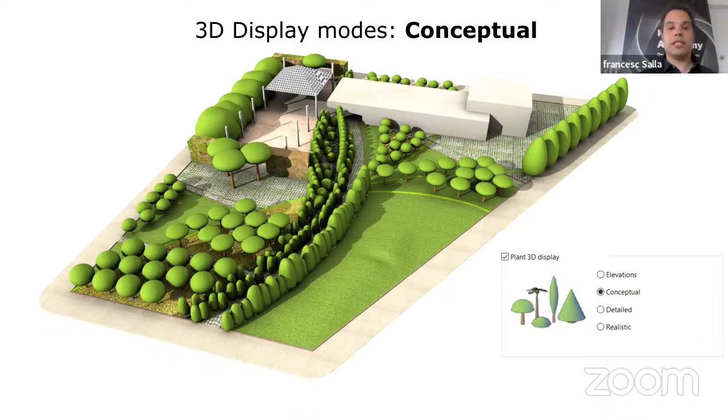All the plants have different representation modes, not only realistic but also 2D crown displays, with 2-3 different display modes in 2D. You can switch from conceptual display to a detailed or realistic mode, where the 3D geometry contains textures for leaves, trunk, and flowers. They are kind of proxies though, since when we shoot renders, even the detailed plants get replaced by more realistic plants.

They can also handle different appearances according to seasons, so we can run a kind of season simulation render with the same project in winter or summertime. Here you have a slider for selecting the season where you want to shoot a render.

There's also a 2D representation for all these elements. When we switch to 2D, all the plants are displayed with a 2D crown, all the terrains are displayed with contours, and all the urban furniture and blocks have a specific 2D representation, so you can easily work in 2D.

We are seeing that many landscape architects are more used to working in 2D, with more 2D background. So we want to make this transition to BIM easier for them, so they can still work in 2D and switch at any time to 3D representation, or work the way they want.

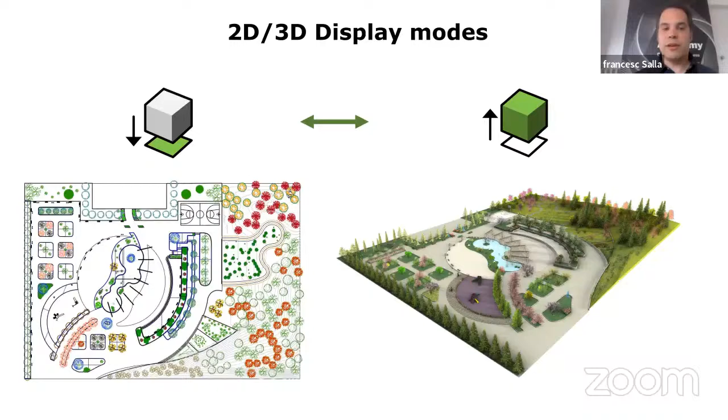Again, we can shoot renders with different representation modes according to season. All these realistic files can be generated by a plant editor built into the program, so you can add more plant species and generate these 3D plants using this plant editor.

There are more than 8,000 species, but if you're looking for a specific species not in the plant database, you can add it on your own. You can duplicate an existing file or create it from scratch, developing one of these 3D plants with this plugin and adding new species to the database.

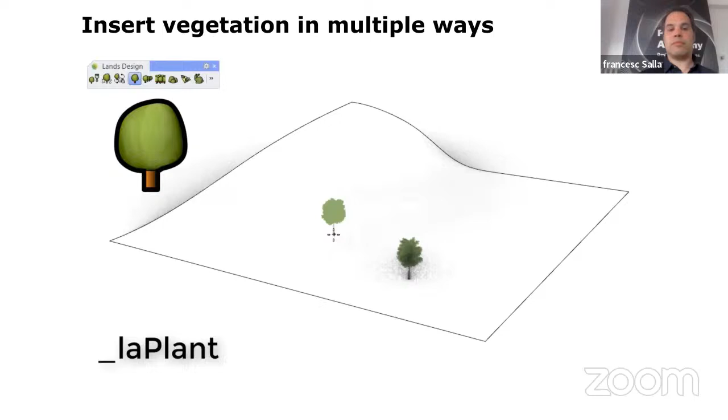All these plants can be inserted in different ways, individually of course. Notice we have a kind of surface that acts as a terrain, so the plants detect that topography and get placed on top of it.

Plants can also be inserted in a paint-like way, or by selecting points or blocks. This is a usual situation where you get a DWG file with the location of all the plants from points or blocks, and you want to replace them with real 3D plants.

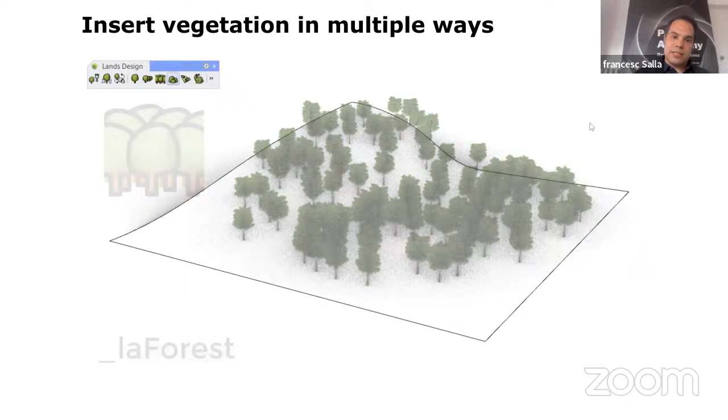We can also insert plants in rows or forests. These are parametric arrangements, so we can decide the amount of plants and the separation of these plants in these forests or rows. We always work with parametric objects with many parameters.

In this case, with ground cover, we control the density, the size of the plant, and species, and so on. There are also many powerful terrain modeling tools.

We can create terrains from points or curves. They are meshes, but they contain all the information of the operations we perform on top of them. So we can add custom fields, add paths, and change the width of the path at any time.

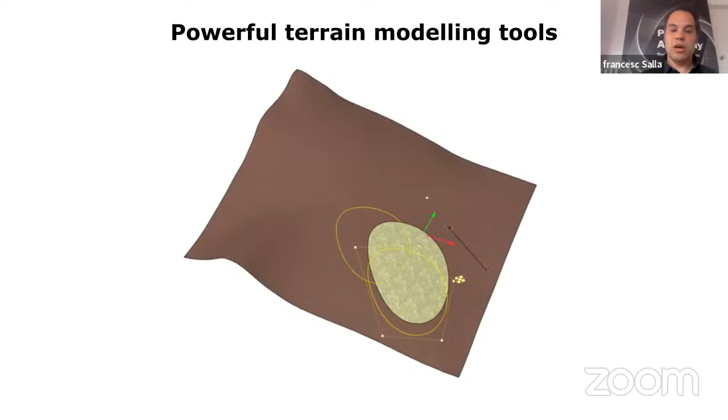Also, the volume of earth movement can be reported. According to these operations, we can generate different reports and, based on that, take some design decisions because we know the amount of volume that has been added or subtracted from adding a path.

So, well, we work with parametric objects. Also, terrains can be created from DEM files. Basically we run this command.

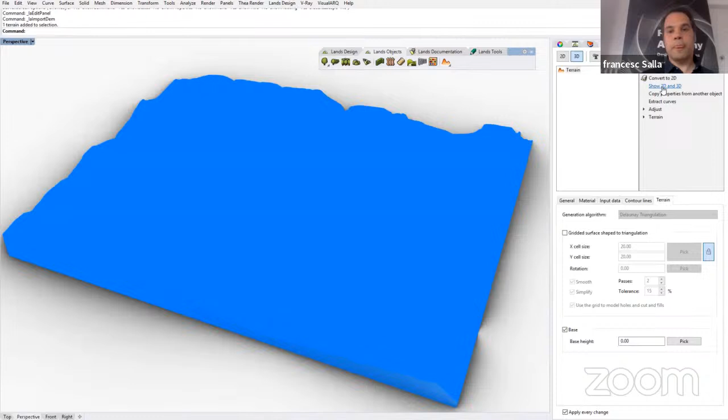We select one of these DEM files and select an area that we want to import, and we automatically generate a terrain out of it, with the option to show the contours, the 2D representation, and all of them labeled with the elevation.

And also from the Earth - this is a command where you can navigate over the world, go to a specific spot, and read public information. We have elevation data samples every 10 meters, and also the volumes.

It's information that we can import into our model. This is just a good tool for creating an environment of the project site, because if you want to work on a real place, you'd rather use a topography survey and import the points from that survey into your project. But for the environment, it's a really great tool.

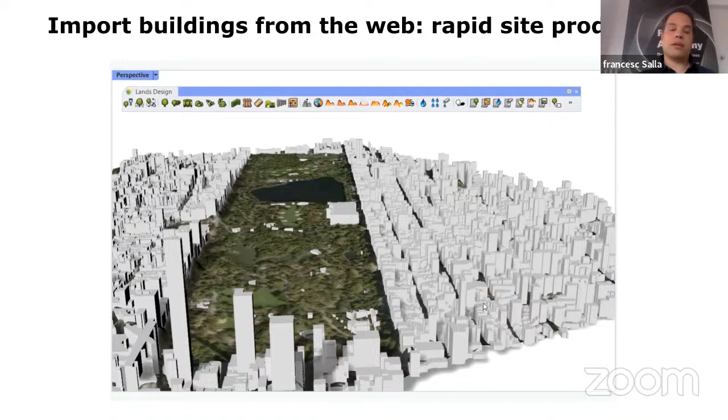And then there are parametric hardscape tools like walls, stairs, ramps. It's a new feature in this version, or fences. And also some irrigation tools for creating sprinklers, piping systems, or arrays of sprinklers.

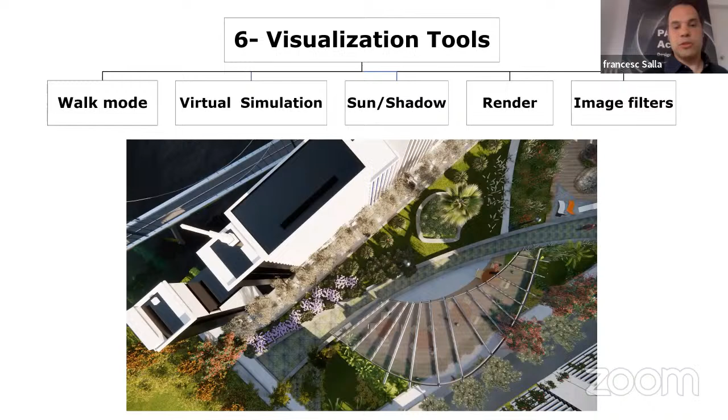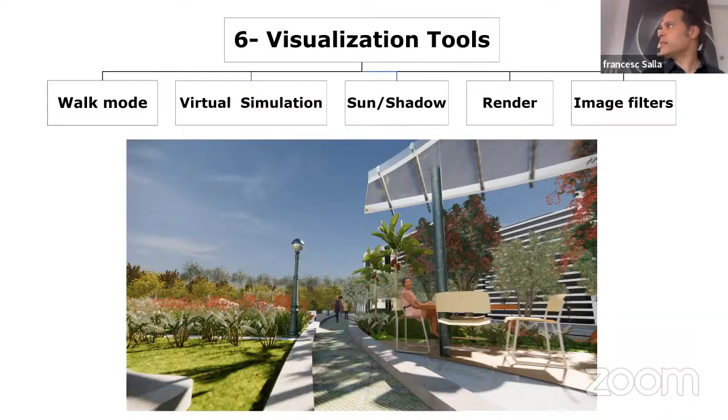For visualization, I've mentioned the option to shoot renders for season change simulation, but also, since it integrates with Rhino, we can run sun movement simulation. Or there's a walk mode to navigate through the project. But of course we can also create videos like that. This is created with Enscape, but already in Rhino there are tools to create animations.

And since it works on Rhino, it integrates with all these other amazing tools for creating virtual animations, like Enscape, Twinmotion, Lumion, or shooting nice renders as V-Ray. Also in Rhino there are great tools to produce nice renders.

And then, well, there is all this integration with Grasshopper to create parametric architecture. And we have all the Lands Design components available from Grasshopper. I don't know if you all work with Grasshopper, more or less. So that's where I don't have to explain what Grasshopper is, right?

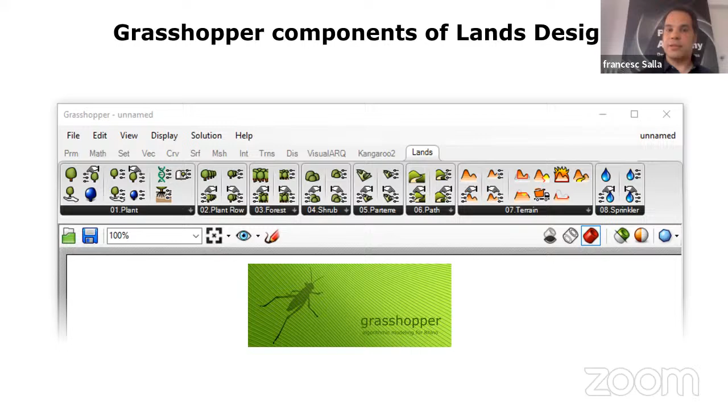That's good. But yeah, I mean, we have here the components to create plants, terrains, paths, sprinklers, and here we can see some examples.

So for example, we can reference all these plants from the model and create these pots at the bottom that are based on the size of the plants. Or we can distribute different plant species on these regions based on two lines that split these regions into different paths.

Or we can generate terrains directly from Grasshopper. We control the precision of this terrain at cuts and fills based on boundary curves, and everything is integrated here and available from Grasshopper.

Also we can use the Grasshopper components to map some environmental data with the existing 3D model. For example, we got the data from the CO2 absorption of certain plants during some years, and we were mapping this data with the existing plants in our model, and we could determine a kind of CO2 absorption analysis for a certain period of years based on that data.

So according to the amount of plants we have in the model, we could have an estimation of the CO2 absorption that is linked with our design. Based on that, we can also make some design decisions.

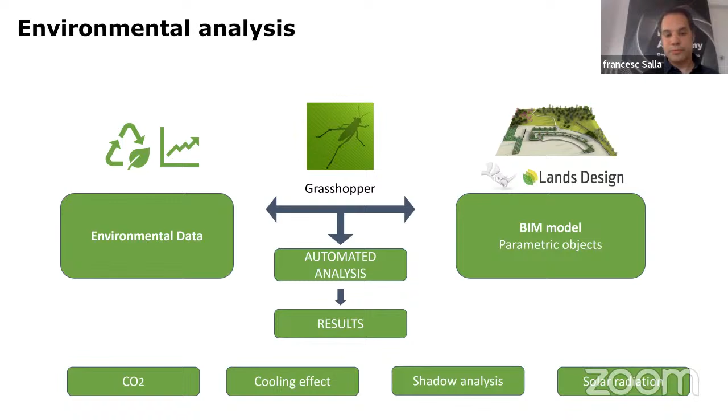And also, if we run Rhino as a plugin for Revit using Rhino.Inside, and we have Lands Design installed, we can reference this terrain in Grasshopper, deconstruct that mesh, and create a new topography element in Revit. Everything is live connected, so we can work on this terrain or plants in Lands Design running as a plugin for Revit, and everything would be transferred immediately in Revit using this connection.

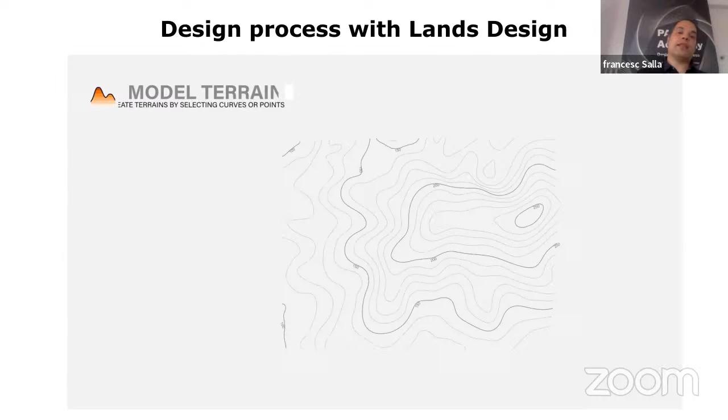And this is a video that shows some of the main features of Lands Design, showing the design process. So we may start with some 2D curves - sorry for that poppy music - but yeah, from the curves we create terrains, or we can import terrains from the web. And then once we have the terrain, we add paths, we modify the terrain according to cuts and fills.

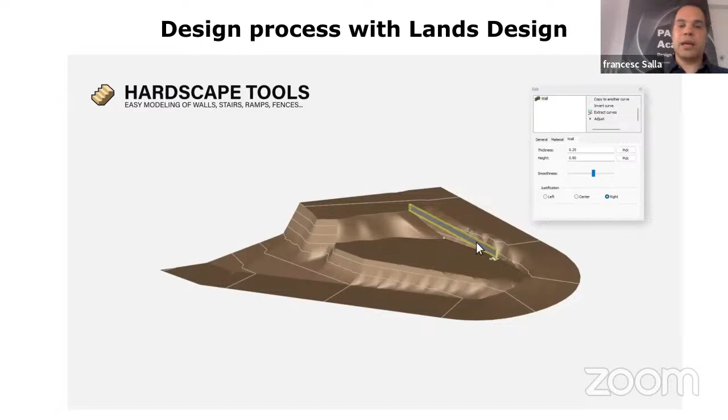From boundary curves that we select, we then add some of the hardscape parts, such as retaining walls, ramps, fences. They are all parametric objects, so we can change the distribution of the posts, the elements of the post or the walls, the thicknesses, and in the case of stairs, all the flights or dimensions of these objects. So we could do that in Rhino, but we have these parametric objects that make life easier.

Or we can insert some blocks from a library that already comes with the program. Of course, you can integrate other blocks that you have from your own library, or that you found on the web, since Rhino can open many different file formats.

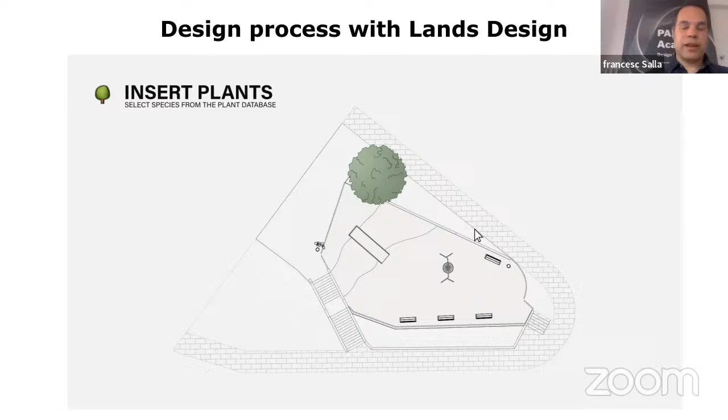And finally, there is the most exciting part when we populate the project with the plant species. We can insert plants individually, and we define here the size of the plant. We can insert them through different arrangement options, like in a row or in a forest. And finally, we just document the project.

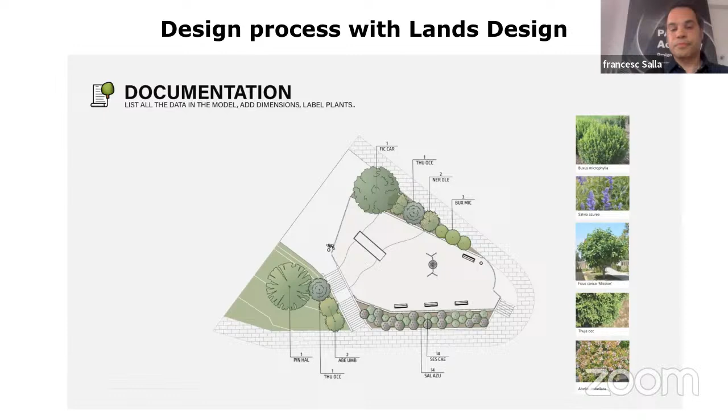Okay, so we have tools for adding labels to the plants, or for zoning the project, adding pictures for the plant species, and a beautiful layout showing the plant species report. And of course all the visualization part to show renders, record nice videos according to different seasons, and have a beautiful video at the end of the day from your project.

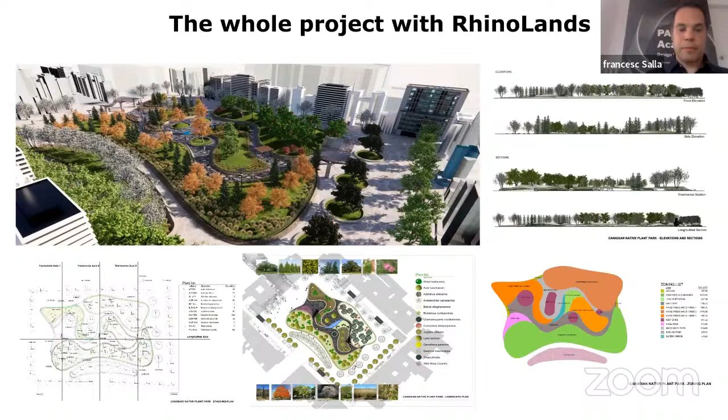So this is a kind of summary of the design process of what Rhino Lands offers. This could be a final layout with not only 3D views, but also 2D plans, zoning diagrams, reports of the plant species, pictures, everything. And that's it about Rhino Lands.

We developed the program based on users' feedback, so they will be very welcome. Rhino Lands is released on Thursday, but you can already enter into the website. It's public, you can already check it out, and actually even download the program. So on Thursday will be the official communication, but it's already there.

And that's it about Lands Design and Rhino Lands. So I don't know, do you have any comments or questions? Or we just talk about VisualARQ.

Yeah, maybe one question. The rendering, does it also work with... what do you use? That's not game software. Unreal, yeah. It should, it should.

All these plants are nothing but meshes with textures. They are embedded into kind of smart blocks, that's why we can change the features of these objects. But at the end of the day, they are just meshes with textures. If Rhino can export meshes with textures, plants should be transferred as well.

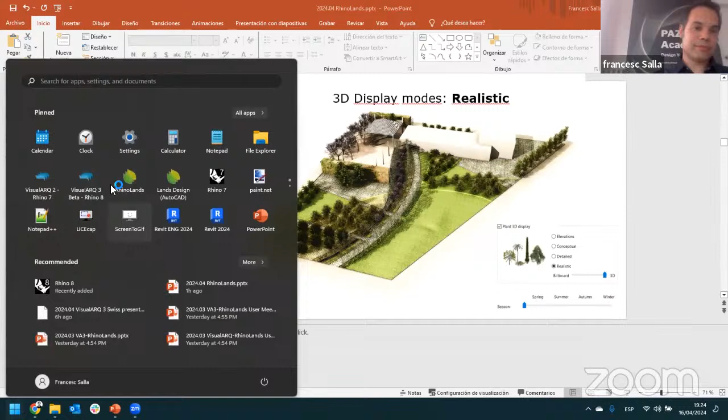Yeah, maybe I can launch the program here, so you have an overview of how it is. And we know that, okay, we had...

A selection of all the commands that we considered important in Rhino, but we are aware that we'll get many requests of tools that we missed. And of course, everyone uses Rhino in a different way and uses commands that maybe others don't even know exist. So we are preparing ourselves to receive many requests of commands from people already used to work with Rhino, and that they will miss them in there.

But again, Rhino Lands is actually aimed at people who have never used Rhino. So probably your Rhino users will use the other version, the other skin.

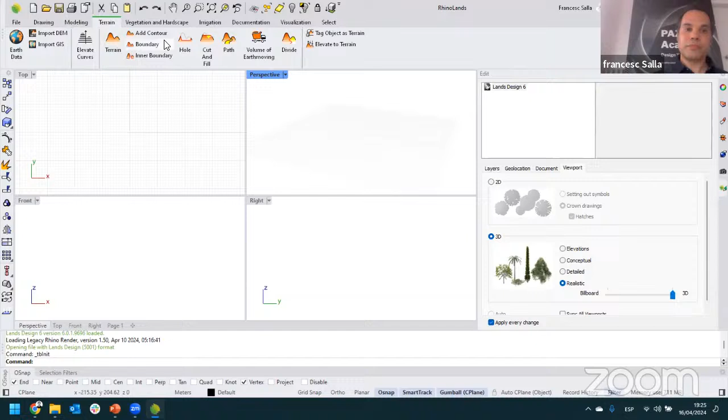Okay, and here we have distributed the commands from 2D tools to 3D. So it's a kind of timeline order, where you start with 2D, then go to 3D, then to terrain tools, and then you populate everything with hardscape tools and vegetation tools. Finally, you document the project from irrigation tools to all the documentation for listing plants, urban furniture, zones, and so on. Here we have included the Rhino drafting tools. And finally, all the visualization commands to shoot renders, also change the viewport distribution.

Okay, and here's some select commands. And basically here with the panels, we have a selection of the panels that we consider the most important for a new user, like the layers, materials, sun, rendering, and also the Lands Design, where you edit everything that you select in the model, okay?

And here the sidebar is just the transform commands, the everyday commands that you constantly work with. And of course, the command line, the status bar with the OSNAP.

This is something that needs to be... well, sometimes it's closed, so you can open it. I don't know, what's your feeling about this...

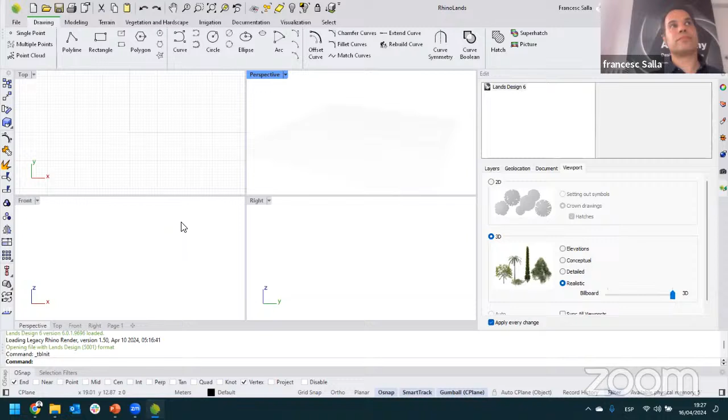Skin, new interface. Can you drag and drop the toolbars? Yeah, that's the same thing. So we can take the command line and put it in another position, that works in the same way. It's nice to have that simplified version.

So we'll insert a plant, at least to show you the feeling of inserting a new species. Okay, and now like this one.

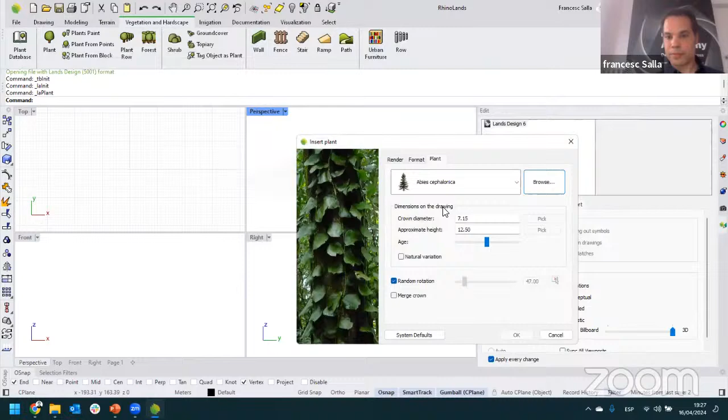Also, there is a new feature we have added, so you can now control the representation mode by viewport.

Okay, also we have here some basic zoom options. But now, in Lands Design 5, the former version, when you switched to conceptual, it was changing in all the viewports. And when you were switching to 2D, it was switching also in all viewports. So it didn't make sense to show you the plan in 2D because you could see just a line and elevation.

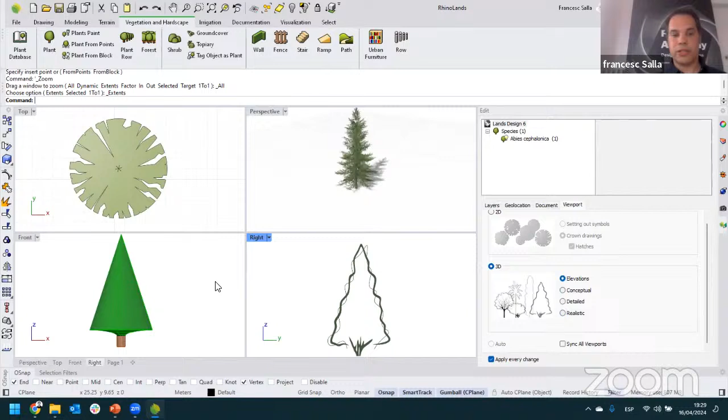Now, okay, you still have the option to synchronize all viewports. That's how it worked in Lands Design 5. But now you can say, okay, I want the 3D, I'm gonna synchronize it to have it the same in all the viewports. But I can also say, I want to show the 2D crown here, the realistic representation of 3D here, and the elevations representation here. So that's pretty nice.

Also, we have some features to join the 2D crown. Here we can select these plants and merge the crown, so we have like a contour line for all these plants.

Also, hatches is something optional, so you can customize more tools to customize the appearance of the 2D plants.

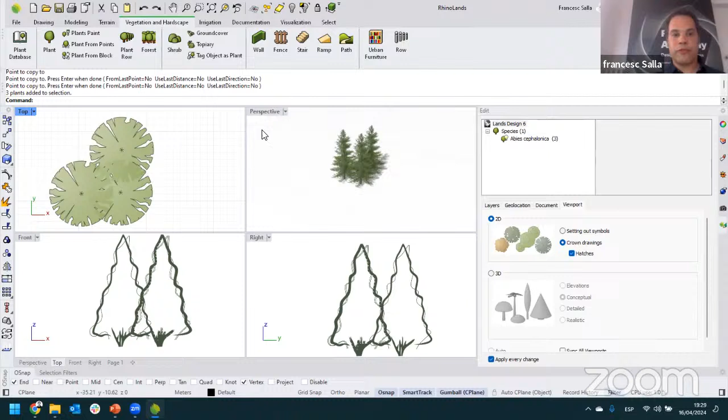And also as a new great feature, the ramp object. And that's something that is missing in VisualARQ, so I feel a little bit envious. I wish to have this tool also in VisualARQ. And it sounds stupid that, okay, we're the same company, we don't put the same thing in both programs, right? But well, yeah, things are this way.

So we can, for example, also have a curved ramp. We can have a path curve like this, and then run the ramp command. Here there are all the parameters. We can also have variable widths. And I'm just going to choose the default options.

So the height will be... no, you define the height in different ways, either as a constant slope, as the ending height, or as a rise-run proportion.

So if we create a ramp of 2 meters, and then I select this curve.

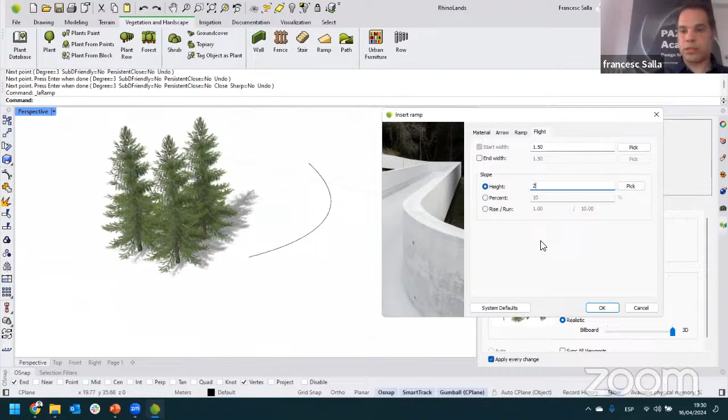Okay, so that's going to be the ramp. Even though we define this ramp with a total height, we still have the information of the slope percentage here. Or we can make a constant ramp with the slope. And of course, this ramp is based on that path curve, so we can change that with the control points.

This is one of the new features in Lands Design, which is really nice. Also, this can be floating, so you have just a slab with a specific thickness. There are many different options you can explore here.

Any more questions? You say we can now or just now? Yeah, you can. Shh, the secret.

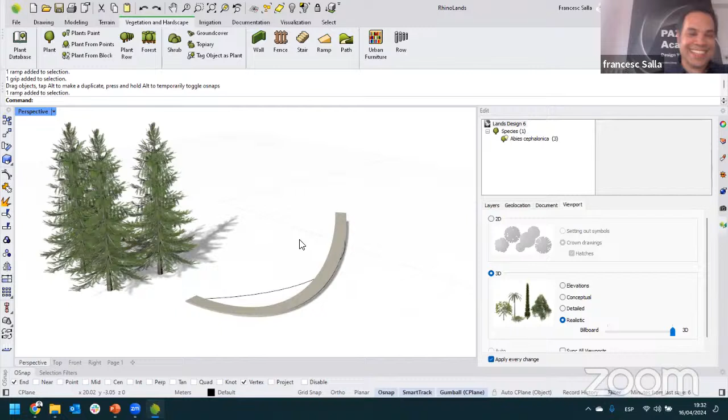Is there a trial period on the license? There is a trial period of 60 days, because also there is a new licensing method through subscription with Rhino Lands. So you have both permanent licenses, like Rhino, but also subscription-based licenses. So now you have the two options. And for that reason, we have reduced the evaluation period from 90 to 60 days. Rhino is still 90 days, but if you have Lands Design, it's less.

Two months is already a good period. Yeah, if you don't forget that you install it one day, because that's the typical situation - you install it and you forget it, and when there are just 5 days remaining, you say, okay, I have to test that. If we had a 1 year evaluation period, people would remember only in the last week that only 2 days are left.

Okay, so let's move to VisualARQ. I think I didn't open the presentation yet. It's here.

I mean, you know VisualARQ, Kevin, already. What about the rest of you? You don't know? You never worked with it? Okay, so you know it a little bit?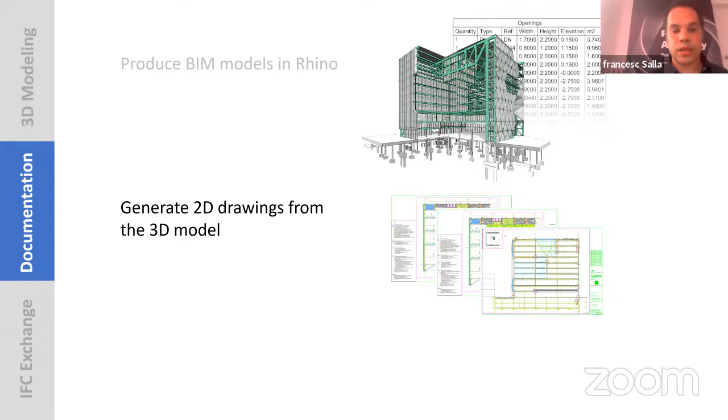So again, VisualARQ is developed according to 3 different paths. The first one is to help producing BIM models in Rhino. The second development line provides tools for producing 2D drawings and documentation from a model in Rhino. And finally, it also helps users exchange Rhino models with other software through IFC. We have users that use VisualARQ in totally different ways, even though all these paths are connected - some use it for all 3 reasons. But according to each development part, there are some features that can be interesting for different people.

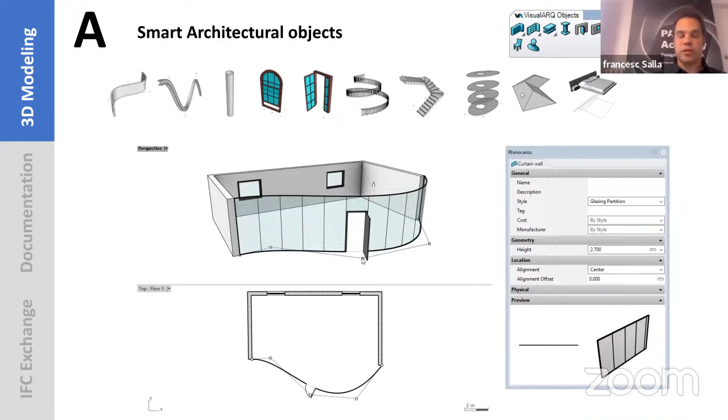Starting with 3D modeling tools, we can find this library of architectural objects. They are parametric, and they have different representations in 3D than in 2D. They have some intersections - walls intersect each other, so they clean their intersection. Doors and windows generate the opening automatically in walls or curtain walls. So there are these associations that make these objects more convenient for quickly modeling a project, but also for producing the 2D drawing because they already have a 2D representation.

Also, there is a level manager, and I will show later some improvements in this panel. This helps you work at different elevations. Each level has a construction plane at a specific height, and just by double-clicking on one level, we can hide all the upper levels and put the construction plane on one elevation.

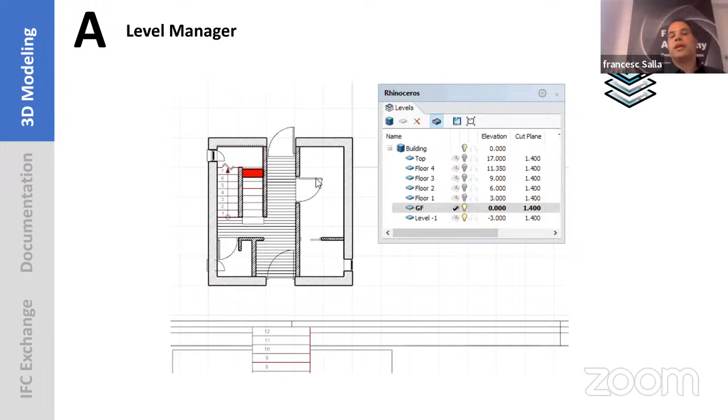That way it's very easy to work on one floor or another. Also, we can activate the cut plane from there, and when we show a model with a cut plane activated in top viewport, all the objects show their 2D graphical representation. So the doors show the 2D arc, we can see the steps, the numbers on the stair, and other features.

In a similar way, we have the section manager. We show a list of section lines that can be jogged, created from different points, unlike clipping planes. From there we activate one section or another, or we can align the project to a specific section view, so we can work directly on the sectioned model.

VisualARQ provides two different ways to produce 2D drawings. One is similar to Rhino's Make 2D tool that you may know, basically laying all the 2D drawings on the model space as 2D geometry, which is not the best BIM approach because in a large project you may have dozens of plan views and section views, and if you create a 2D drawing for all these views in model space, the file size becomes very heavy.

But still, there are some tools to produce 2D drawings that way. The other option is to basically show the real-time model displayed in section or in plan view, in a page layout, and this is possible thanks to the hidden display mode.

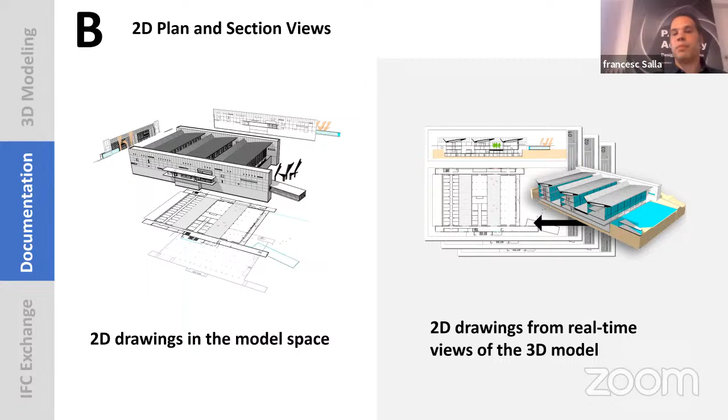So talking about the first option, there are tools to insert 2D plan views and 2D section views, and they are blocks linked with the 3D models. In Rhino 8 we can find some of these features as well, but until now you could only use VisualARQ for them. These blocks are linked with the 3D model in the sense that we make changes on the 3D model, select them, update them, and they will be recalculated with all the changes.

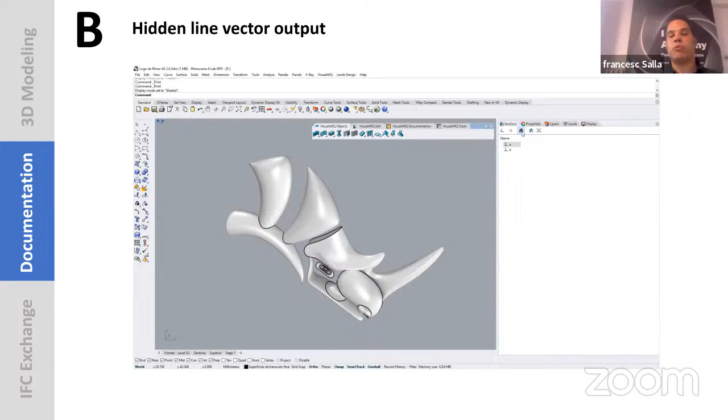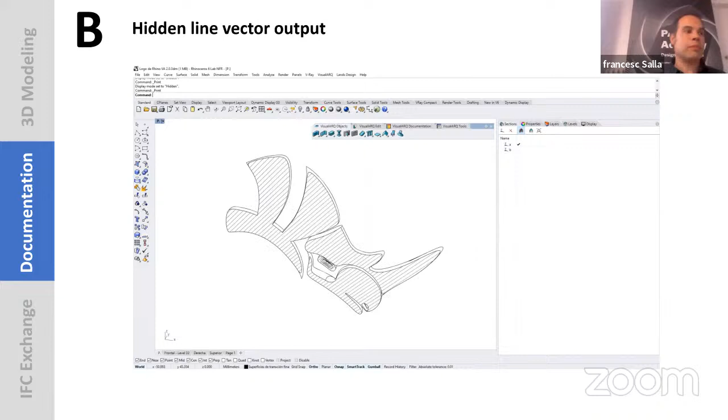But talking about this other method - this hidden display mode I was talking about lets you print what you see directly to vector output. You know that when we are using shaded mode or rendered mode, we can only print that as a raster image, otherwise we see all the edges and wires of the geometry. So if we want to print that model or any geometry as vector output, we can only do it using the hidden display mode, which is provided by VisualARQ.

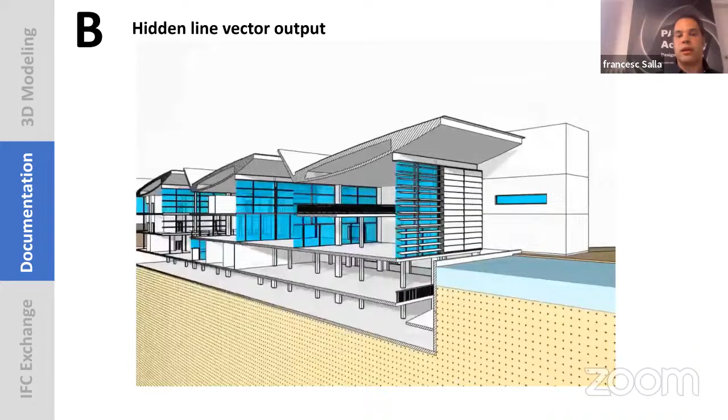So in an architectural project, it's just a matter of having a model in plan view or section view, and as soon as we use this hidden display mode, the project is ready to be printed to PDF or to a plot, whatever.

And on top of it, we'll draw all the dimensions and so on. Talking about IFC, all the VisualARQ objects are transferred to IFC with the object type they are. So we open that model in Solibri, Revit, ArchiCAD, and we identify the objects as beams, walls, windows, and so on. In most cases, or maybe a few cases, all the parametric features will be preserved - a wall in VisualARQ will become a true wall in Revit or ArchiCAD.

But the reality is different, because depending on how you have created this wall, the other software may not recognize these objects as a true wall, but as geometry tagged as a wall. Or for certain object types like stairs, railings, or curtain walls, we will only be able to transfer geometry with a specific type as static data design.

But for Rhino geometry, we can use these features to tag, for example, a polysurface as a slab. We can tell any piece of geometry to be exported as a slab, as a beam, as a roof, and the other software will identify that as a slab or floor - not as a native one, because the original geometry could be anything, but at least as something you can document and find in the other software.

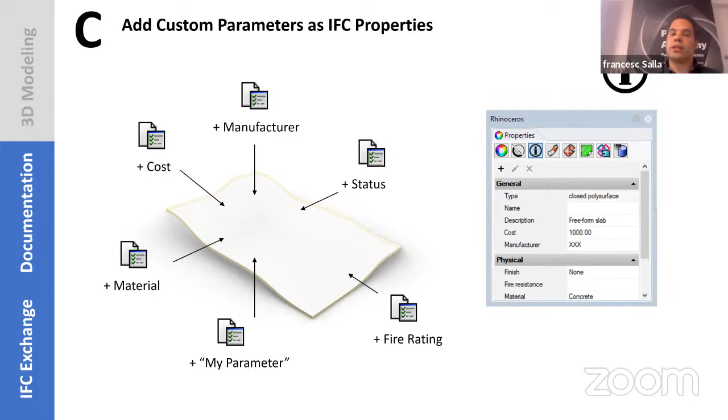Not only the IFC type, but also custom parameters can be added to geometry, and they will be exported as IFC properties, stored as other parameters. All this data can be displayed in tables, and there is a new feature in VisualARQ 3 I'm going to show you related to that - a new way of producing quantity takeoffs, because right now you produce them as 2D tables in the model space.

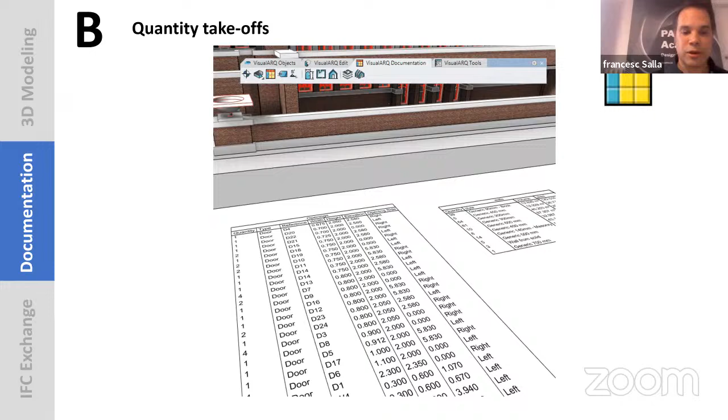In a second, you will see how this works in the new version. This concept of flexible BIM basically comes from two different reasons.

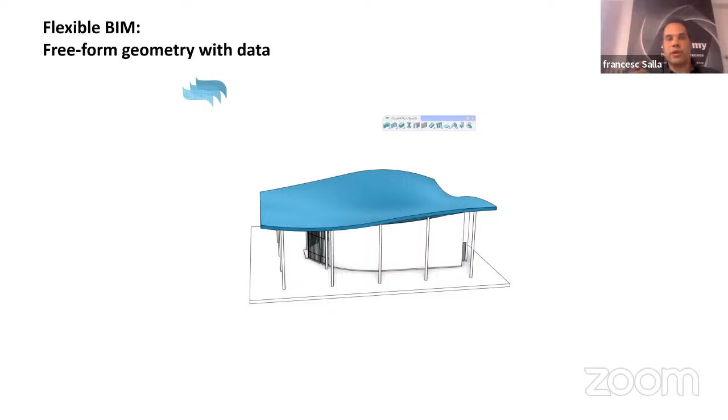One is that VisualARQ lives in the Rhino environment where we can create any kind of freeform shape. And with VisualARQ, we can turn these freeform shapes into informed objects, so we can work with complex geometry in a BIM environment.

But the second reason is because of the way it integrates with Grasshopper. VisualARQ does it in two different ways. On one hand, all these architectural objects can be created from Grasshopper definitions, so we call them the Grasshopper styles. On the other hand, we have all the components available in the Grasshopper interface.

Talking about the first case, this is like a regular Grasshopper definition that generates this sliding door. This is a kind of door that is not possible to achieve with system doors in VisualARQ. So we have sliding doors, but you cannot control the position of the leaves and other details.

So this is a Grasshopper definition that generates this door, and we can use it to produce a new door style. All the input parameters that we have in the Grasshopper definition become parameters in the properties dialog. So we can change the dimension of this door directly from the properties panel, but we're basically editing using the Grasshopper parameters that are running in the background.

And Grasshopper is hidden now at this point, so people who don't know Grasshopper can take advantage of these objects that are generated by a Grasshopper definition.

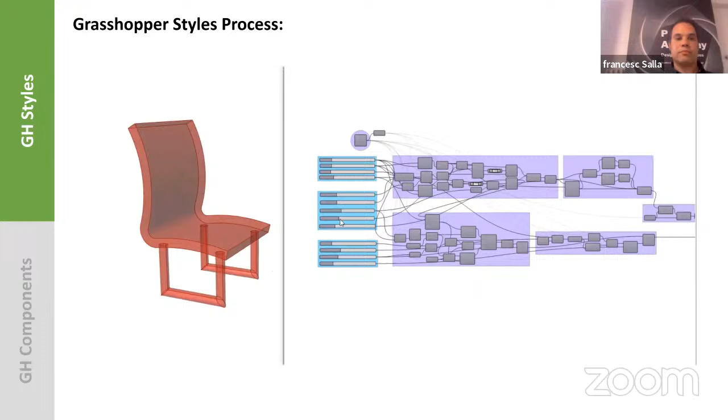This is a short video of the Grasshopper style process. We have a Grasshopper definition that generates this parametric chair, and we create a new furniture style using that Grasshopper file. Once the new style is created, we define the default parameters, default dimensions, but also we can assign materials to different parts of it.

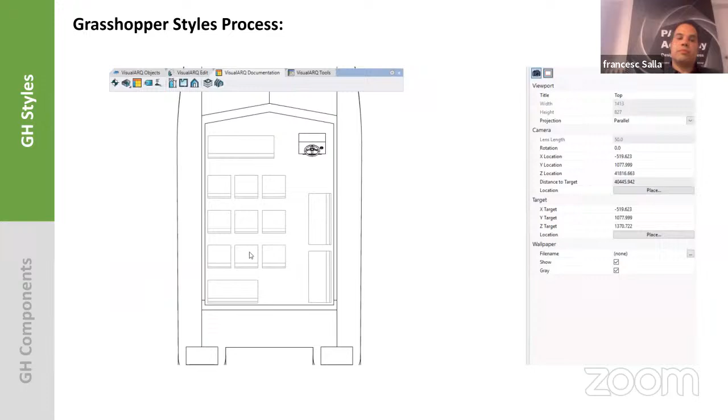But at this point, we can just insert this object in our model. We change their parameters from the properties dialog, and all these objects that we have can be listed afterwards in tables. So yeah, we have custom dynamic blocks in our model driven by Grasshopper definitions. That's the idea.

Any questions about that? Do the custom objects also have a different 2D representation? Can you also set that?

Yeah, you can have in your Grasshopper definition some output components that are assigned later on to the 2D representation of the Grasshopper file, of the new style. So you control which geometry goes to the 3D representation and which other goes to the plan representation.

Am I correct that you have like a base chair, for example, and then you can modify that chair, changing the layer, changing the number of legs, and then import that modified one into Grasshopper? Yeah, you can reference that chair, the adapted one, and then modify it further and do all kinds of stuff. Yeah, you can reference styles, objects, and the styles, and you can read the parameters that this object has, even if it's driven by a Grasshopper definition, and do modifications based on these parameters.

So yeah, also the goal is that in Grasshopper you generate something, you bake it, and this becomes like a dead geometry in Rhino, it's not parametric anymore. But with this integration, you have one object that is using, I mean, you have hundreds of objects using one style, using one Grasshopper definition, and all of them can be changed parametrically in Rhino. And you have like a parametric object.

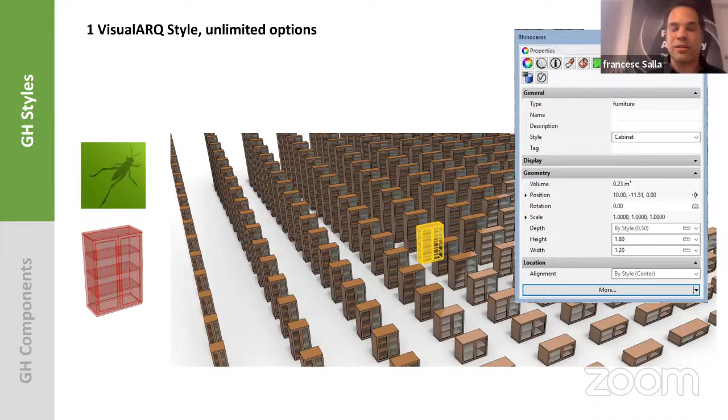On Food4Rhino, you can find some of these objects that people share.

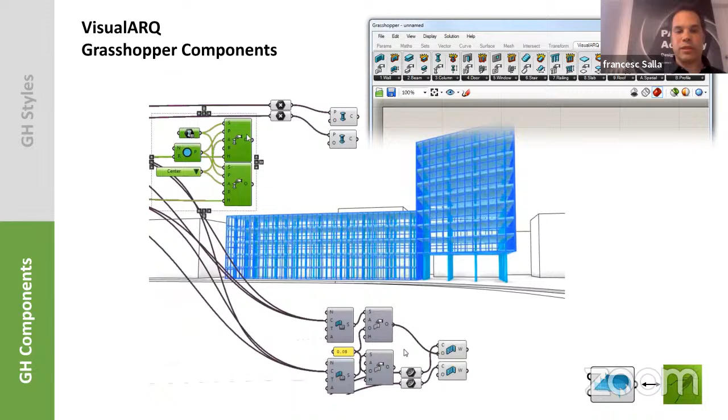And well, this is like the other way VisualARQ integrates with Grasshopper, similar to Lands Design. So we have all the components to create walls, curtain walls, columns, and so on available here. We can create parametric designs with these objects, and once we bake them, they become VisualARQ objects in Rhino.

So basically, there are components to create new objects. Like in this case, we have a wall that requires a path curve, and then we have some other options to change the height, to change the alignment, to assign some style. So we have also components to create new styles. Styles are what determine the features of objects, like in the case of walls, the number of layers and the thickness of the wall layers.

And then we have the opposite commands, to deconstruct objects and obtain their path curve, their height, and also the information of the styles, so number of components, the layers, the thicknesses. So all these are available there to do anything you want.

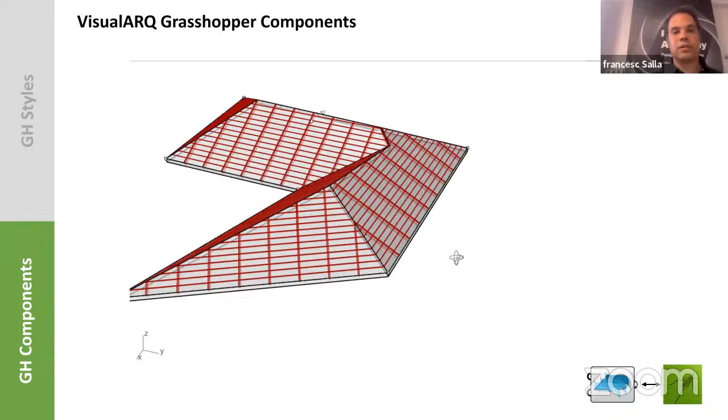Yeah, like parametric towers done with slabs and columns to generate the structure of a roof automatically, just referencing a roof and obtaining all the top surfaces and generating all the structure with beams. Also to manage data on geometry.

For example, in this case, all these columns are referenced using this component, and we can bake a list of names to that geometry with this component. It's an update property, so with a push of a button, we bake the list of names to those columns. So we can assign data to geometry very quickly, just with a few components. And later on, we can use that data to create reports, to export that information to IFC files and so on.

Or if we run Grasshopper files with a Grasshopper Player, we can also generate VisualARQ objects at the end. So, do you know if you're using the Grasshopper Player? No? Do you know what it is? Because, I don't know why, but many people don't know about it, even people that use Grasshopper.

So the Grasshopper Player is basically a tool in Rhino where you select the Grasshopper file and it lets you run a command like any other tool. In the Grasshopper definition, you define the steps to follow the command line, and the geometry that you make after the command ends.

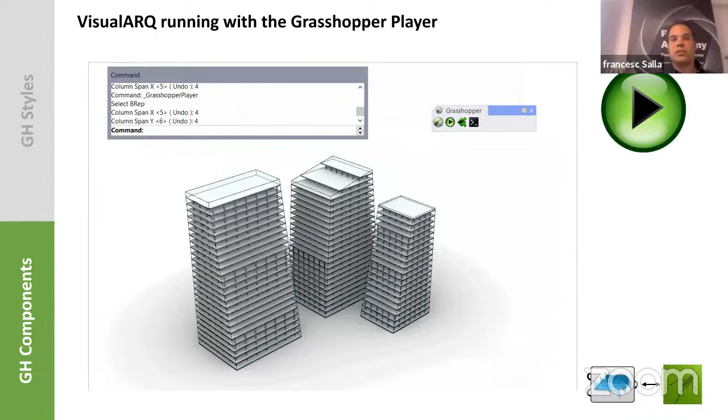So in this case, we are creating some structure by picking a volume and then defining the column span in X and Y direction. But actually, everything is controlled in the Grasshopper definition. Once this is done, we can share the definition with somebody who doesn't know Grasshopper, and they can just run it as a new tool or a new command.

And using this technology, we are able to generate more commands for VisualARQ. This is the VisualARQ Labs plugin, also available on Food4Rhino. It basically expands the VisualARQ features with commands run through the Grasshopper Player. We put them into a toolbar, and the user just needs to install that plugin to get more commands for VisualARQ that don't exist in VisualARQ itself.

In this example, there's a command for creating slabs by selecting walls. There's a Grasshopper script in the background that takes all the boundary curves of the walls, all the path curves of the walls, generates like a single boundary or two boundaries, and generates a slab using these boundaries. Actually, this is a command that I developed myself, and I'm not a programmer.

I just know some Grasshopper, I have some basic Grasshopper knowledge. So I feel like I can play the role of being a programmer for one day, without having a clue of programming languages. It's great that these tools are there, so you can create your own tools and share them with people that don't know Grasshopper, and automate workflows.

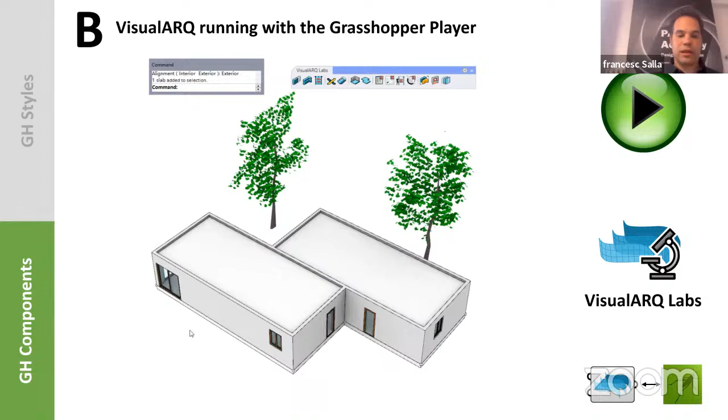And also, in this case, Revit integration. So we have Rhino.Inside, also with VisualARQ running for Revit. This is an example of how it works. With a VisualARQ pipeline, we can reference all the walls. This is actually Rhino and VisualARQ running inside Revit with the plugin.

We can deconstruct these walls to obtain the path curve, and also deconstruct the options to know the height of the walls. Since we're running Grasshopper from Revit, we have all the Revit-aware components to create walls in Revit. In this component, we need path curves, so we know this information since we got them from the deconstruct wall, and we know the height as well. So we have an immediate transfer of walls from Rhino to Revit with just a few components.

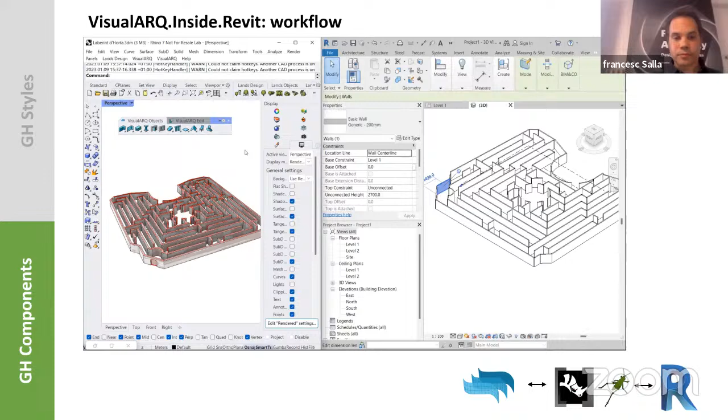So this is like the basic workflow, but we have a more advanced definition for Rhino that is hidden here.

But it not only transfers the geometry, but also the information of the styles. In case of the walls, all the layers, the thicknesses, and generates new families or new types in Revit. So you can just focus on the VisualARQ model, and all the objects will be transferred as true Revit objects. Unlike IFC, here we skip the step of having intermediate files.

Since everything happens in Grasshopper, if you are skilled in Grasshopper, you can control how the geometry and data is transferred. You have better control of the model, how it goes from Rhino to Revit, while in IFC everything is more limited.

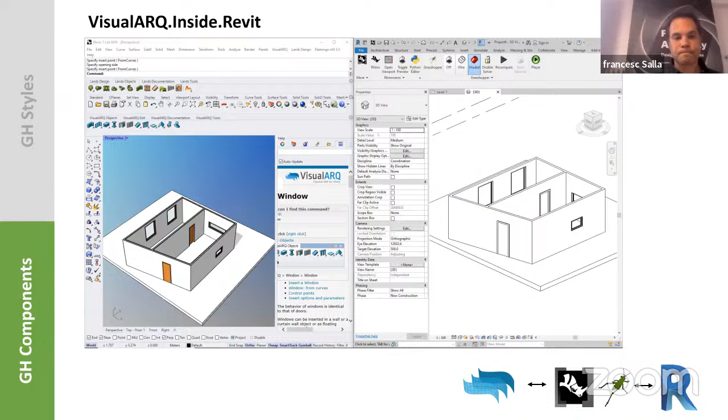This is another example of how you can put that Grasshopper file as a button in Revit. When you push it, you automatically transfer all the model from Rhino to Revit, and you can keep working on the Rhino model. When you want to see the changes on Revit, you go back and push this button again, and it calculates all the changes.

All these definitions are available on Food4Rhino, so you can play with them if you like. And now I would like to show some user projects according to these different ways people are using VisualARQ.

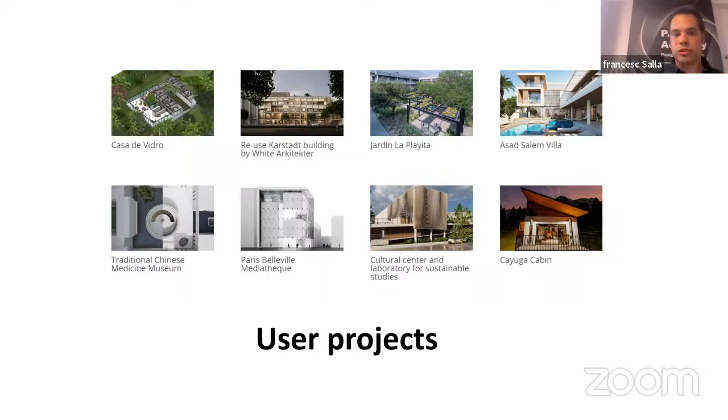Of course, we are seeing VisualARQ widely used in early stages of the design process, from academic projects to conceptual competition projects, like in this case of White Arkitekter.

Also in residential, housing, not only projects that haven't been constructed, but also real projects of different sizes where VisualARQ was used, also for reporting all the bill of materials, all the quantities of wooden frames, wooden studs in this case. So everything was reported with VisualARQ.

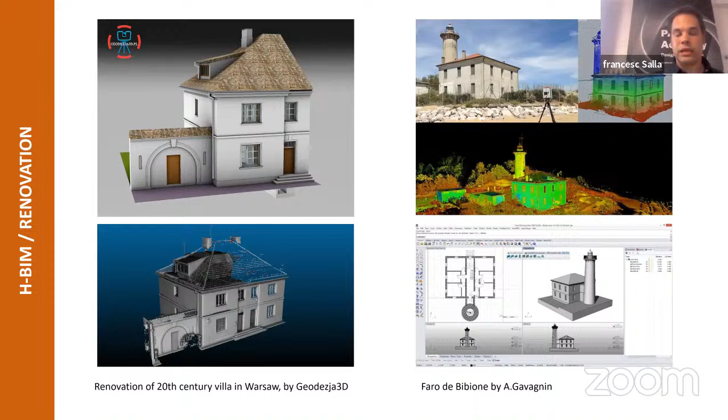Also for historical BIM projects where a point scan has been brought into Rhino and VisualARQ was used to reconstruct everything on top of it with BIM objects. Finally, people could deliver a BIM model at the end of the day, or produce the 2D drawings as a result of having all the 3D objects created with VisualARQ.

For interior design, where you need to set up the environment of the project, you work with very detailed and unique shapes, but you still need to have a wall, windows, ceiling, slabs, and also produce all the 2D views, sections and plan views.

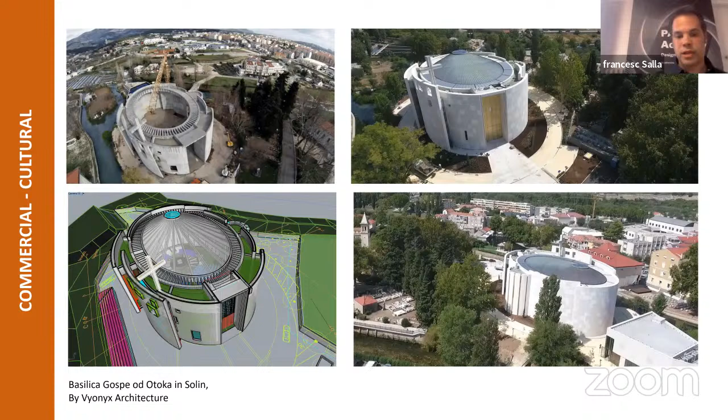So we are seeing also people in this field, or commercial and cultural projects, very unique. We're seeing VisualARQ being used a lot.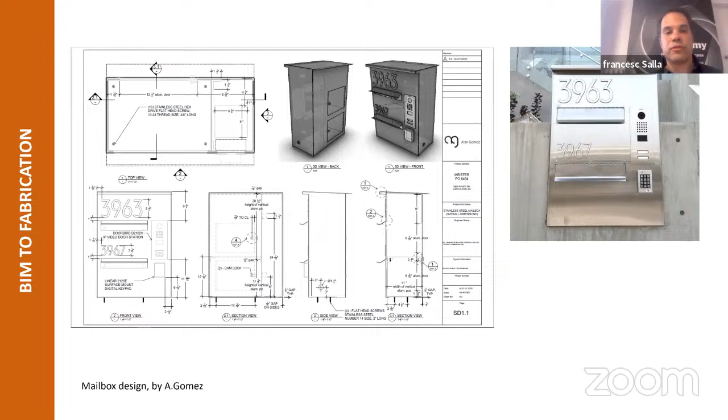And for producing 2D drawings, it doesn't matter the scale of the project. So VisualARQ tools can be used also for small projects like that.

Or in landscape design, also for creating the architecture around the project, but also for the elements in the landscape design, such as floors or beams or structure, you can use VisualARQ.

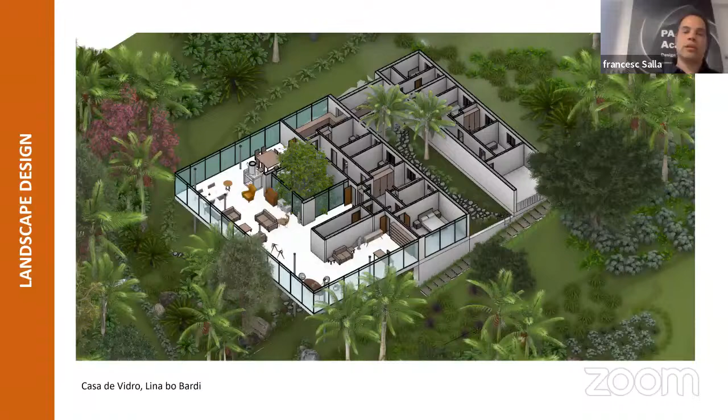Or in marine design, we're also seeing some users take advantage of the tools to produce section views, section drawings, plan drawings, or use VisualARQ objects, for example, to extend walls to a curved shape of the hull of a yacht. So also some of the architectural objects are useful in this design.

And now let's see new features in VisualARQ 3. They are not all, but the most important ones. I don't know when we will release VisualARQ 3, maybe in one or two months. So we're very close after many years of wait.

There have been many improvements in the level manager, because now we can activate this magnet icon, the constraints icon. When this is on, all the objects sitting on one level, or located within a level, move if we change the elevation of the level. The objects just update their position. If you don't want to run the risk of moving an object by mistake, don't worry, just don't activate this button and nothing is going to happen. So you have very good control of the link of objects with levels by activating this magnet icon.

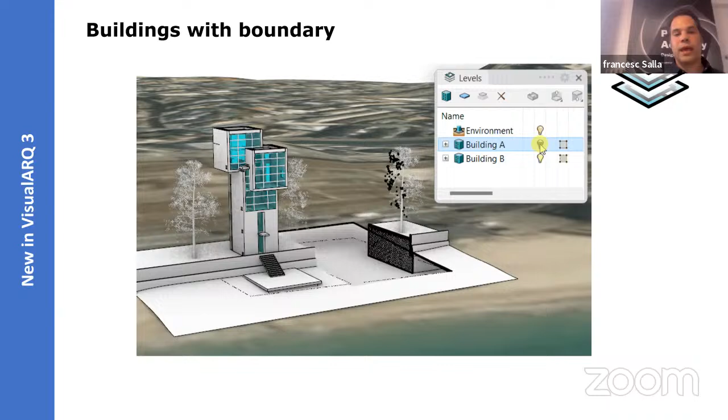This boundary also applies to levels, so that makes it easier to isolate levels if we want to work on just a specific part of the model.

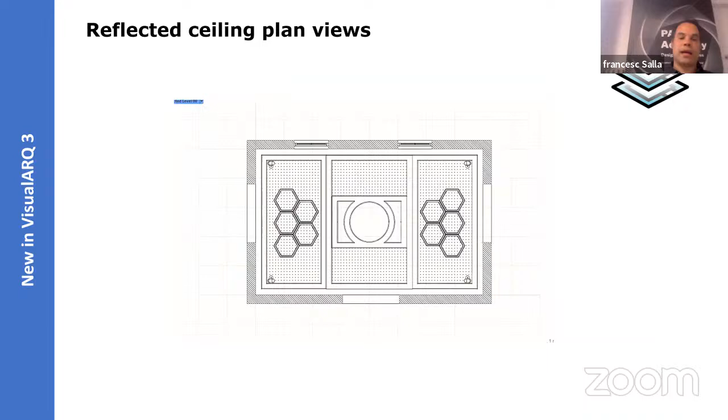Also, we have integrated new tools in VisualARQ 3 for showing reflected plans. Now you have quick access from a level manager to show the model as a reflected ceiling plan, just to show everything upside down, or from the bottom upwards basically.

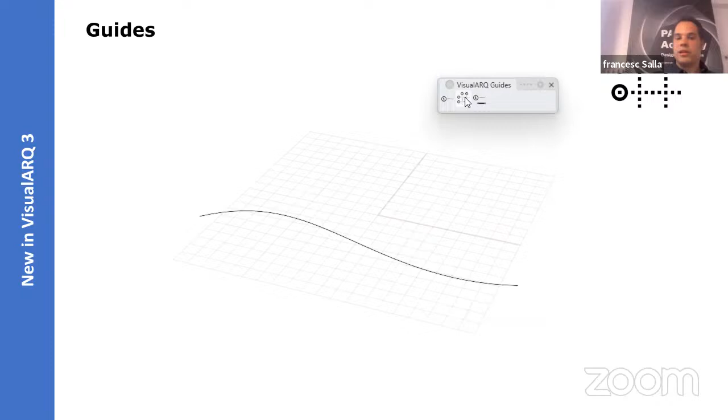There is also a new element: the guide. I introduce you to the guide object, and it's a labeled object that can be inserted as a grid or individually, and can be edited individually as well. When you create objects on top of these guides, they link to them.

Curtain walls are stretched or moved if we move these guides. You also have a big control of which object types are linked to the guides, even if they are sitting on top, if we want to move them or not. So you have very good control of this link of geometry with guides, and not only VisualARQ objects, but also any Rhino geometry, like a box or curve, is linked to these elements.

And what I was mentioning before about the new tables: now they are available from a panel, and we can show all the quantity takeoff reports, and identify the elements by selecting them from this panel.

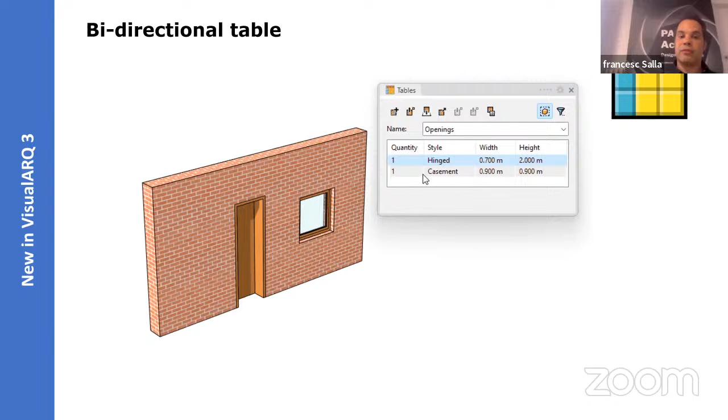This panel also allows us to edit properties of the object directly from the table. So we can change the style of an object, or add data on the object directly from those panels, so they are kind of bi-directional tables. We cannot change the area of an object, that's of course calculated information, but some properties can be editable from there.

You can also apply some filters. For example, we can filter objects by the building where they are, by level, by style, by layer, and we can also see the totals at the end of these rows. That's something that didn't exist before and was very requested by the users, but finally it's a true feature, finally came true.

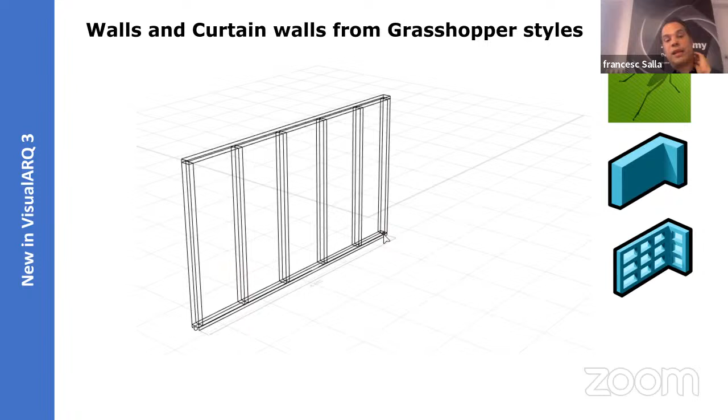Also, Grasshopper styles are now available for walls and curtain walls, which weren't available before. And in the case of walls, the joints are also calculated.

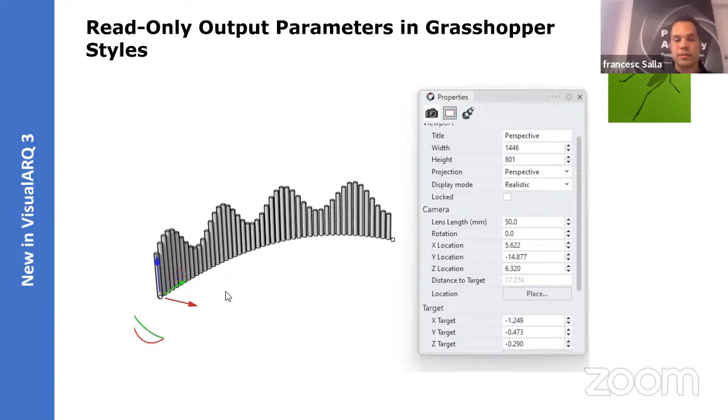Curtain walls can be created from surfaces, and that's a bit dangerous because complex surfaces take some time to recalculate, but we're improving that. It can also be a cool feature to go from conceptual design to maybe real design.

We have also improved the interconnection of VisualARQ objects. So walls, slabs, roofs, and also stairs that have the same hatch patterns as section attributes calculate their intersections and clean their intersection lines, so we have a cleaner intersection, a cleaner section view.

We have also added a layer type for slabs, so that way we can have core layers in slabs, and this will determine the priority when they intersect with walls.

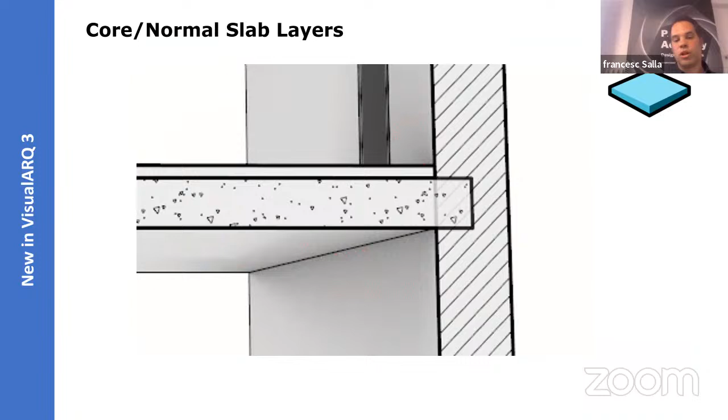Now it's also possible to insert doors and windows in roofs, which is something pretty obvious, but in VisualARQ 2 it's not possible — you need to create an opening manually and explode the window and orient it. So now you can do it very, very quickly.

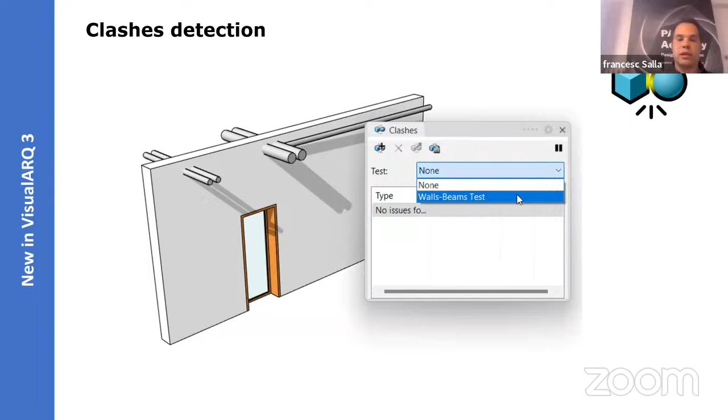We have also added a tool for detecting collisions between two different sets of objects. We can detect soft and hard clashes, basically collisions and clearances according to different criteria, and we can define different filters for each set of objects. For example, we can find collisions between walls and beams, or objects in layer A with objects in layer B, or just find the collisions of everything with everything. So there are many options available for these tests.

This is something that is not available yet in the beta version, but in the final release we will deliver support for IFC4 files.

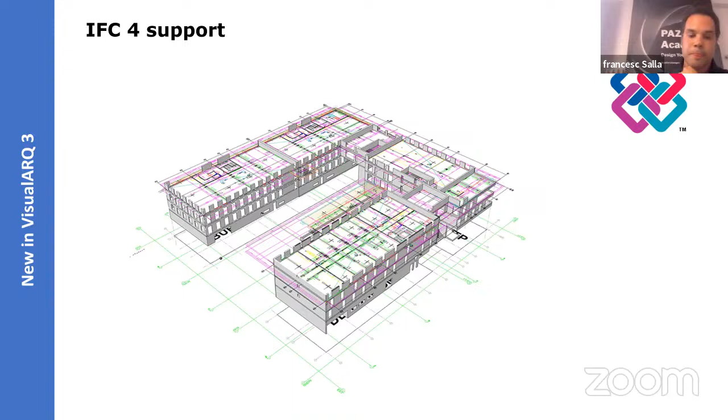Finally, now it's possible to export layouts directly to DWG. That's also a big requested feature. All the 3D model that we see as a 2D drawing in the layout is transferred as a DWG file, and also the notations and title blocks are transferred to DWG, and that's what we see when we open this model in AutoCAD, for example, using the hidden view. You need the hidden view to make this work; with other views, it's not gonna work.

VisualARQ 3 is already available. Only people with a license can test the new version right now, but I hope that in 1 or 2 months, when we finish the support to IFC4, we will release finally VisualARQ 3.